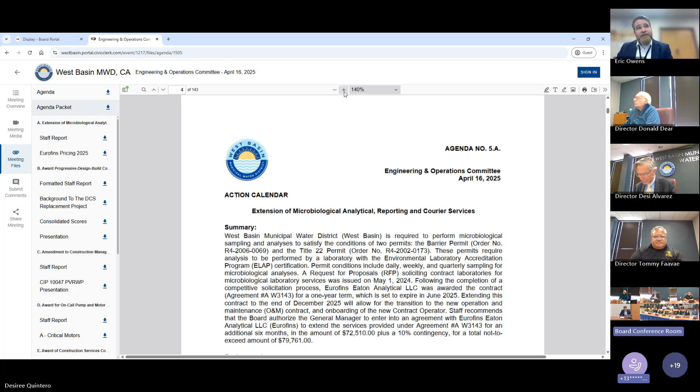Chair Alvarez, today's presentation, we have Mitchell McNearly, Water Quality and Environmental Compliance Analyst 1. I would note before handing it over to Mitchell that there will be a slight revision to the recommendation that he reads, but for the most part it's consistent. So we'll point that out and make the correction before the board. With that, Mitchell.

Thank you, Eric. Good afternoon, Chairman Alvarez and members of the board. I'm here today to present the action item on page 4 of your packet to extend the agreement for microbiological analytical reporting and courier services. Microbiological monitoring is required to satisfy the conditions of 2 permits, the advanced treated barrier permit and the tertiary treated Title 22 recycled water permit.

The permits are issued by the Los Angeles Regional Water Quality Control Board and require these analyses to be performed by a laboratory with ELAP certification. Permit conditions include daily, weekly, and quarterly sampling for microbiological analyses. Both the barrier and Title 22 permits require daily grab samples of total coliform to demonstrate that the recycled water produced has been adequately disinfected.

Additionally, microbiology samples are also collected for the Title 22 distribution system and 11 groundwater monitoring wells. The analyses are performed using standard method 9221, multiple tube fermentation technique, with a 2 MPN per 100 milliliter detection limit and have a short holding time of 8 hours. This means samples need to be collected, processed, delivered, and begin analysis within 8 hours, or the test results are invalid and can result in a violation. If total coliform is detected and confirmed in a sample, further analysis for fecal coliform and E. coli are performed to determine a possible source of bacteria.

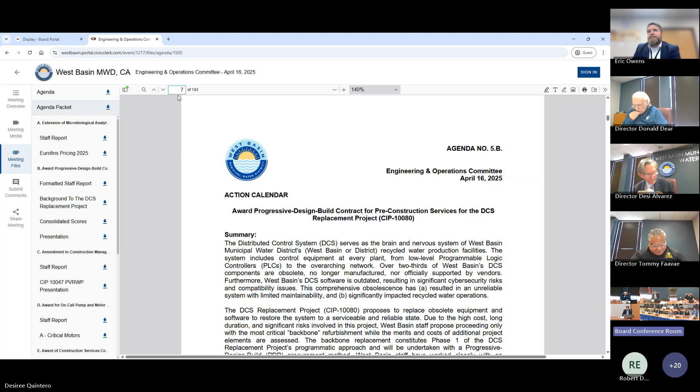Because we have a new director on the committee, I just wanted to give a brief reminder of the background to this decision. So DCS stands for Distributed Control System. You may also hear SCADA, which is Supervisory Control and Data Acquisition. Our system is a hybrid of these two. The district, we commonly refer to it as the DCS. It's a control system that's spread across all of our treatment plants, controls every process from an individual valve up to an entire site.

At the lowest levels on the graphic you see on the right are the PLCs that control individual process equipment, such as pumps and motors. And then at the highest level is the data highway, which is a network. In between those two, you have our controllers and servers, which combine to control the various elements of our plants and store information. These are all accessed by operators at workstations, and these are the computers you see in your plant control rooms and out in the field. And all of these systems are connected via fiber optic cables within our network.

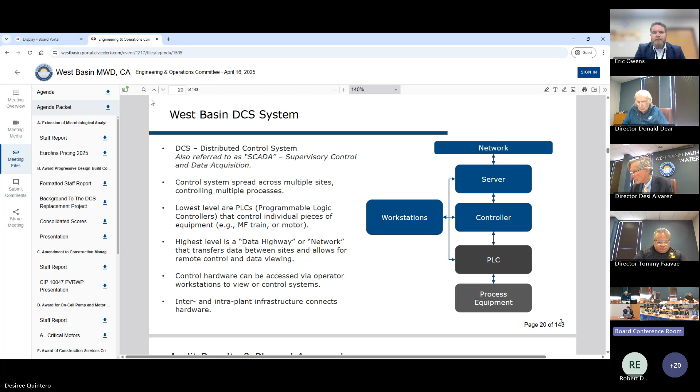However, replacing the entire control system would be a huge task, and as we don't yet know which processes will be required in the future, staff are advising against a full replacement at this stage. Instead, what we've done is separated the control system replacement project into two sections. The current project aims to replace the backbone systems in the top half of this graphic, and those account for approximately 40% of the control system, but 80% of the risk. This backbone of our control system will be required no matter which future direction the district takes. Once this backbone system is replaced, staff will investigate whether further replacement of the process controls at the bottom of the graphic would be beneficial. Next slide, please.

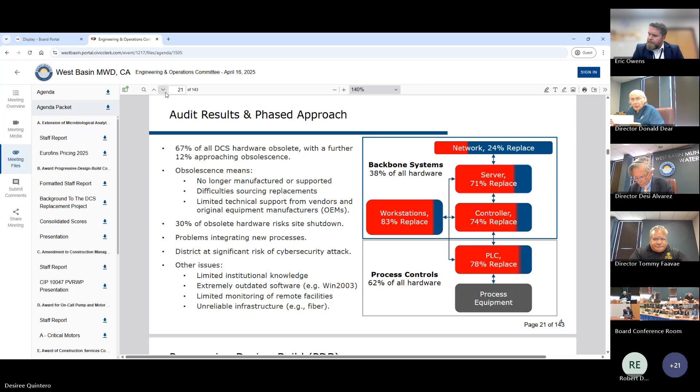Back in February of last year, West Basin staff elected to pursue a progressive design build approach to this project. This effectively means we'll have a single contractor team throughout the system selection, design, and installation. There are a few technicalities that make this approach well suited for this project. In the interest of time, this backbone replacement project is estimated to cost up to $12 million all in, with completion estimated in around 2 to 3 years' time.

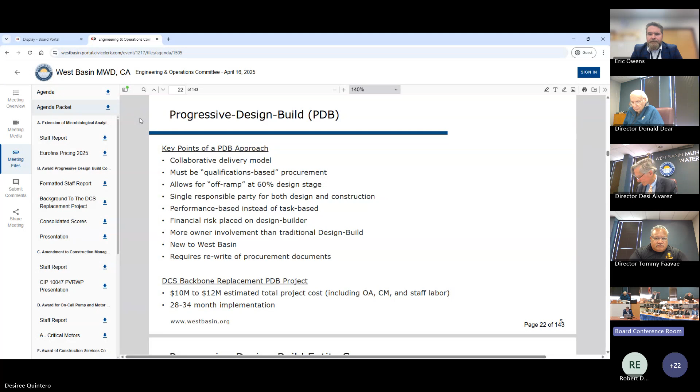I won't go through every task, but task 3 is worth mentioning. It's critical that we select a control system that will best serve the district for potentially decades to come. After the PDBE has familiarized themselves with our system and fully documented every element in the field, they will develop a long list of at least 10 different systems that could meet the district's needs. Using agreed upon evaluation methods, the design builder will whittle this down to a short list of at least 3 systems to be fully vetted and evaluated. The design build team plans to split into 3 groups, each representing and championing a different system, ensuring the final selection is genuinely competitive and not simply based on which vendor has the best marketing team.

While the design builder will present their recommendation, the district will make the ultimate decision on which system is selected. Staff anticipates bringing that recommended system before the board around November this year, towards the end of this calendar year. This system selection is critical to the success of the project, as the design, standards, governance documents, and guaranteed maximum price proposal will all be based around the selected system.

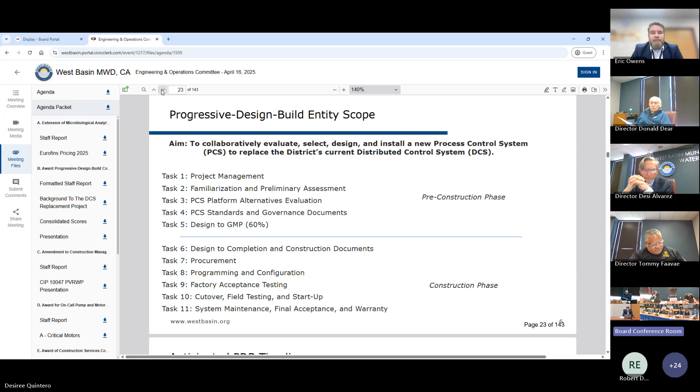We're aiming to onboard the design builder prior to the final quarter of this fiscal year, and staff are aiming to bring the GMP back to the board around the end of the 2025-2026 fiscal year. If approved, staff hopes to begin construction at the start of the 2026-2027 fiscal year and finish around the end of that fiscal year. Overall, we estimate the project will take around 28 months to complete once the design build is on.

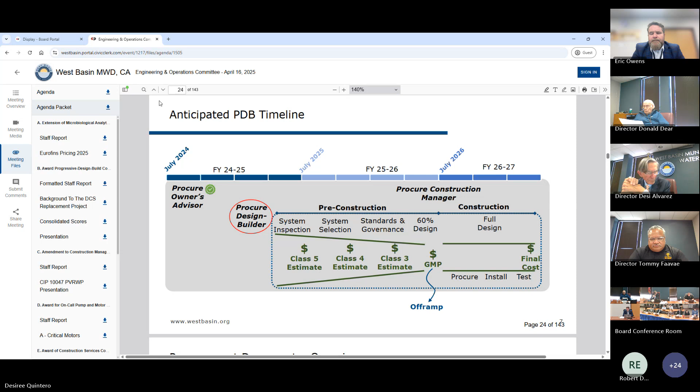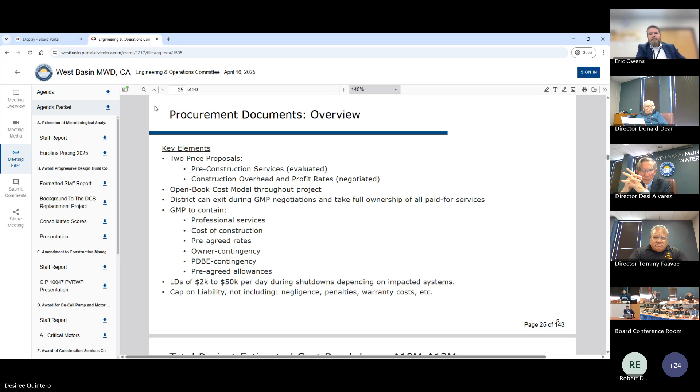Staff is currently estimating this to be between $7 and $9 million for this construction phase, and that estimate will narrow as we proceed throughout the pre-construction phase. In total, that brings us to the staff estimate of between $10 and $12 million over the next few years.

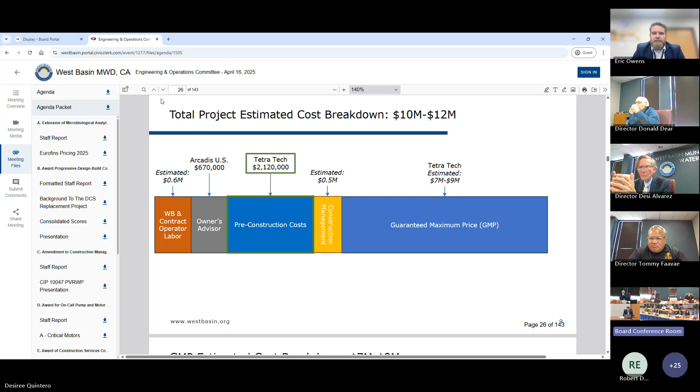And then a profit margin, or overhead profit margin, of 10% will be applied to that by the PDBE. There will also be a significant amount of professional services in the construction phase of this project, unlike a normal construction project, because there's a significant amount of programming and project management involved. Those will use the hourly rates from the pre-construction phase.

Then we have two contingency buckets: one on the PDBE side and one on the district side. Those contingency buckets will be based off of the risk assessment conducted throughout the project. Those risks will be quantified and put into the contingencies, and if those risks are realized, money will be taken from the contingency to deal with them.

And then there are allowances at the end. These are pre-agreed potential work tasks. For example, if we wanted to extend this control system out to our distribution network, we would effectively pre-negotiate a set cost for that work with the Progressive Design Build entity. If during construction we decided to actually do that work, we would pay that fixed cost, but if we don't actualize the work, we wouldn't pay it.

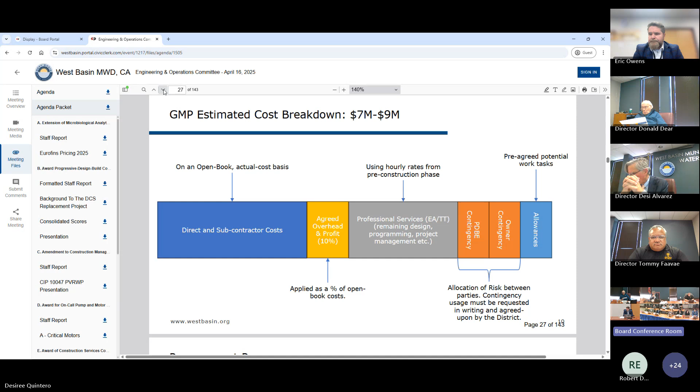Tetra Tech proposed a pre-construction phase cost that was the second lowest with a reasonable hourly rate, which is good since we'll be using that for any professional services in the construction phase as well.

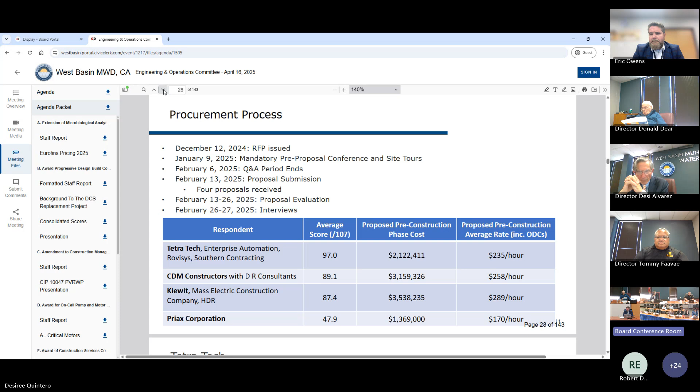The evaluation team is very confident in Tetra Tech's team and proposed plan. As mentioned, the decision was unanimous, for a few very good reasons. While Tetra Tech is the primary entity, the bulk of the work will be undertaken by their subsidiary company, Enterprise Automation, with Rovisys providing automation support and Southern Contracting undertaking the boots-on-the-ground electrical work. It's important to note that Southern Contracting are a member of IBEW Local 569.

The proposed team has delivered over 3,500 DCS and SCADA projects. They are certified experts in all of the major systems out there, in some cases being one of only a handful of firms holding the highest level certifications. They are fully system-agnostic integrators, so either Enterprise, Rovisys, or both are some of the biggest US integrators for many of the major control systems. Rovisys, for example, has now installed more Rockwell systems than Rockwell have themselves. Due to this, the team holds significant leverage over these vendors, which will benefit West Basin as it ensures the district isn't held hostage by any vendor we select. There are more reasons listed here, but I'll keep moving in the interest of time.

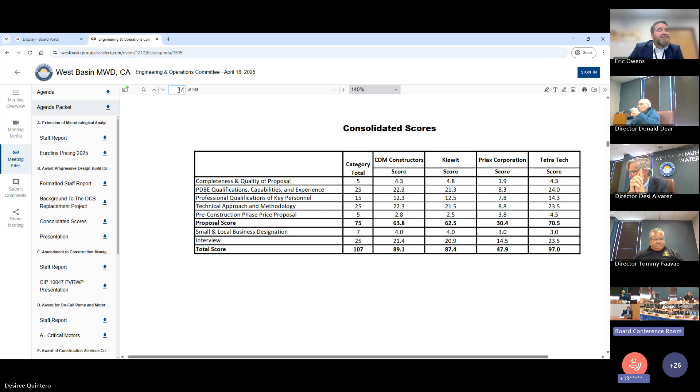I have a question or clarification. So go to page 26. You mentioned that you're going to come back after the pre-construction phase here, and we're going to retain a construction manager. Yes, intention. So that's separate from the owner's engineer?

Correct. Initially those were going to be the same contract. Yeah, that's what I thought. There could be a request to separate those. The owner's agent would not be precluded from bidding on the construction management, so there is potential that it's the same. Okay, but that will come back then as a separate one, and that will come at the end of the pre-construction phase.

Ideally, we'd bring it back slightly before so they can review the GMP as well, just to make sure that there's a construction analysis. And just to remind me, the GMP price is going to be separate.

In other words, we're going to pay for the pre-construction for Tetra Tech to do all the design work, make the recommendations for what their installation's going to be, et cetera. And then they will be paid a GMP fee for the actual installation and modifications and upgrade to the DCS. Yes, if we agree the GMP with.

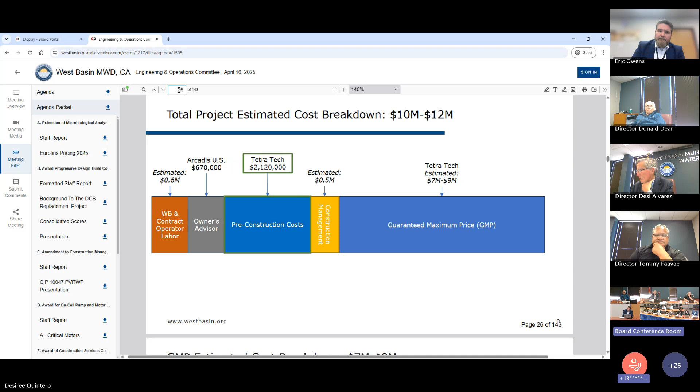Yeah, absolutely, I'd like to see that, like a chart that kind of gives a breakdown of that. We have a rough estimate on slide 24, at page 24, but we can make that more detailed. That's just in quarters. Oh, got you. Yeah, I think more detail would be good.

That's it, Chair Alvarez. Chair Alvarez, if I might also add that under the progressive design build project delivery method, not only will the board have an opportunity to review that guaranteed maximum price before making the move to award it and move forward, but if we cannot come to terms with the contractor based on their design through this PDB process, we do have the option of taking that design and putting it out to the market and allowing them to go through a bid process just to make sure we're getting the best price.

And how long would that process be? The same as our current process. I mean, it would add months to the procurement of a new contractor to deliver that design, but it is an off-ramp that if we're just not coming to agreement with the costing that they have developed for the guaranteed maximum price.

Would it be like a progressive timeline, like the progressive DB that went out? Would that be- Yeah, this is a key part of the progressive design build process, and that's why we chose it. It allows us to have that off ramp around the 60% design.

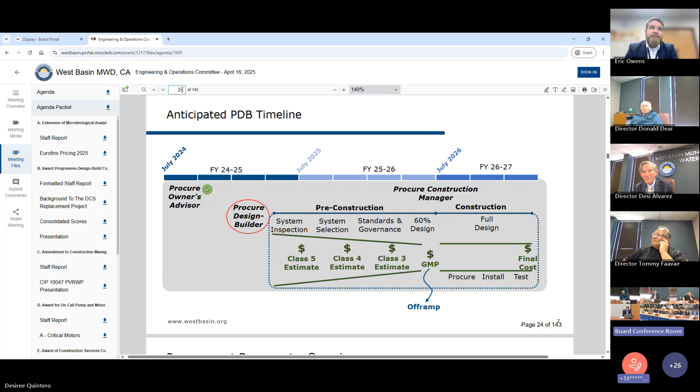All right, okay. So I shouldn't see any additional need for help now putting together the bid document. We're going to have basically a pretty complete set of specs. It's just a matter of putting on that front end stuff. And if you guys can't do it, you'll have.

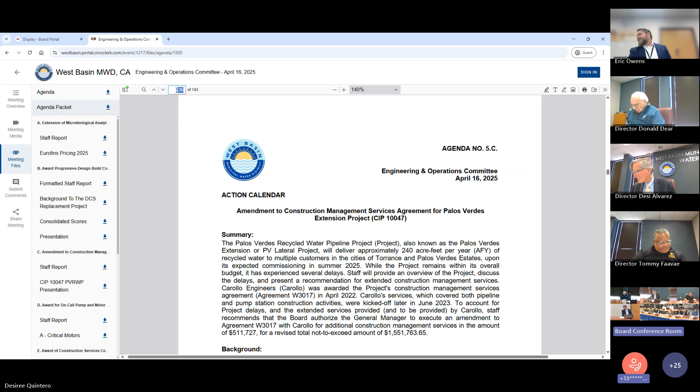One of the items or issues we have encountered is delays. Those delays, as you can see on the slide, are on the pipeline and on the pump station too. This particular slide covers the delays we encountered on the pipeline.

As you can see, there were issues getting the permits issued for the contractor, and there were also changes right at the beginning of the project regarding traffic control plans that had been previously approved by the regulatory entities, as well as underground utilities found along the 3.5 miles of pipe we installed. In addition, some rains affected our construction on Vista Montana, resulting in a closure of that street for a while.

We also worked with the city to rearrange the slurry sealing to still stay within the bid quantities but accommodate the areas.

Another hurdle we've had is the SCE redesign of the underground conduit. SCE had originally given us plans, and then when we were in the field there were some changes, one due to erosion we found, and also closeness to a tree, which generated another set of plans. We quickly worked with them and were able to identify what needed to be done. But we also need SCE to come in and master meter and power that particular facility.

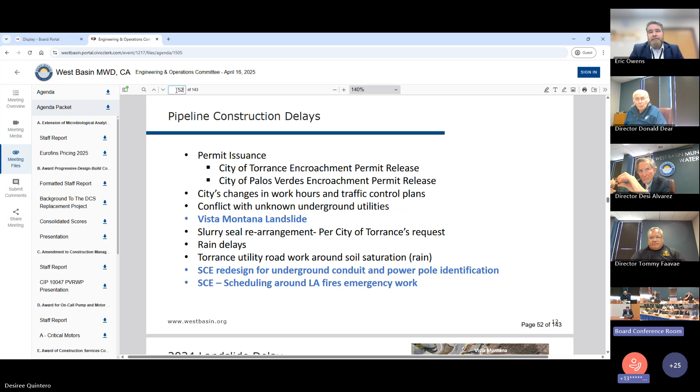Slide 20 concentrates on the delays we encountered at the pump station. In similar fashion, we have some issues with permits, some underground utilities, some rain. One of the biggest hurdles we've had regarding completion of the project is the delivery of the switchboard.

It's the only piece that unfortunately didn't make it on time for the contractor to install. While we are having discussions with the manufacturer, the vendor, and the contractor, right now the manufacturer has advised us that the switchboard is expected to arrive June 12, 2025, which means that's when we'll be able to commission this facility, adding a significant delay to the project.

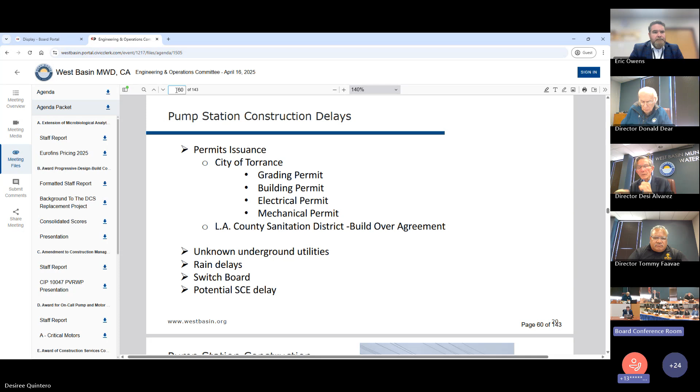Following that, we again need to work with SCE to come in and power the system in order to get the project tested and commissioned. So all of these delays lead us to what are the next steps on the project -- let's go to slide number 30, please.

So on the next steps, we've completed the installation of the pipeline and we're closing out some items with Palos Verdes Estates and SCE. We're hoping to close out this project in May 2025. For the pump station, the contractor has been able to continue with normal operation of construction. There are some activities around the parking lot expected around 2025, and the delivery of the switchboard that comes more towards summer.

You see a range on timing for the SCE energizing system and estimated close-up because SCE could be ready on day one when we call them to energize the system, or it could be a delay of a couple of months. That's why you see a range on the estimation on the close-up.

As you can see, if you can go to slide number 32, this has had an effect on our construction management services, performed by Carollo Engineers. From the very beginning, we had a late start on the project due to all these jurisdictional entities we had to obtain permits from, which had different timelines on delivering those permits to us. However, once we started the project, we ran into construction issues also.

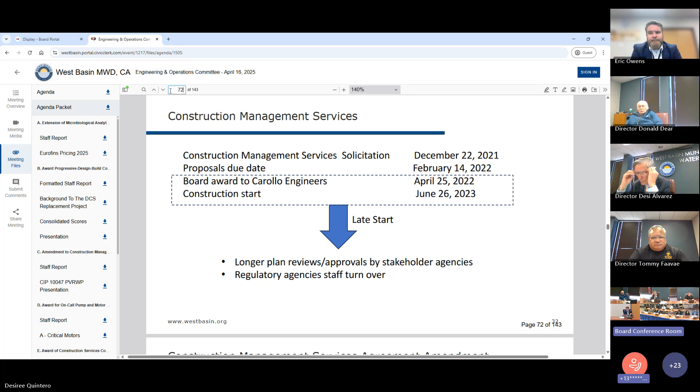So if we can go to the next slide, slide number 33 - this summarizes the differential, or the deltas, on the duration of the pipeline. The pipeline has exceeded by an additional 140% on timing, and the pump station by approximately 50% of the original timing, as of April 1st, 2025. This means our construction management services performing inspection in the field have also exceeded the originally anticipated time to perform these two projects.

So we have been working with Carollo Engineers on negotiating a number, and we are here to present that Carollo is requesting an additional $511,727, which equates to 2,197 hours total for construction management, resident engineer, project controls, and inspector.

And with this, if we can go to slide number 34. On this slide is a summary of what the original contract is, what the amendments have been, and what we are proposing here as a change order.

The original project was awarded for $962,624.40, with a 10% contingency approved. We have only made one amendment with the contingency of $18,849, and the rest of the amendments we have done are just for time extension, to get the project completed. Right now, we are requesting the amount of $511,727 to do amendment number 5.

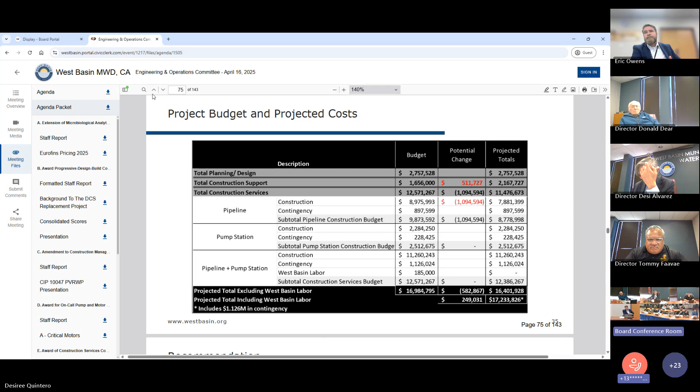So this is not unforeseen? The $511,000 - well, it is, but that's construction management services. If we go to the previous slide, we had awarded the project for $962,624.40, and the 10% contingency approved by the board was $96,000.

There was an amendment, so approximately $72,000 remains in contingency. But the $511,000 exceeds what is remaining in contingency. That's why we are asking for that amendment approval. That's all the questions.

Thank you. Director Dear, no question? President Gray, do you have any comments, questions? No, I don't. Thank you.

I have a couple of questions and comments, kind of for the future, but overall, the project is going to be finished in May. Correct? Yes, we're waiting - that includes the pump station.

The pipeline installation is completed and master meter - we're closing an item with Palos Verdes Estates and we are still working with SCE to come in and power the master meter, which is the window we're working with them. Monica, you have a slide, I believe, that has that note on there.

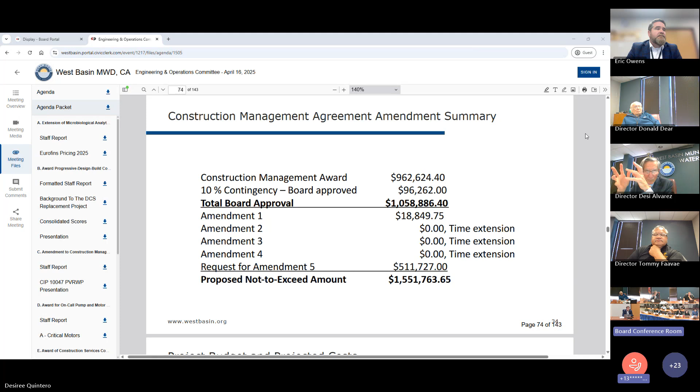Yes. And I just want to make sure the directors understand that with this switchgear delay, it won't be delivered until, I believe, June. But my point is that for all practical purposes, the project is finished and we're waiting for a switchgear, so it doesn't mean you're going to have a CM sitting around. There will be some downtime, I think, waiting for that final piece.

But we shouldn't be paying for that - it should be sent home. And the same thing on the pump station, because you have both the SCE switchgear. If I recall that slide, it affected both parts of it.

So most of the work being requested for additional reimbursement here is work that's already been done. Yes, and that's been incurred over the last 6, 8, 9 months. So my question is, we've already incurred this - we're not looking to modify or amend this contract for additional work that's forthcoming.

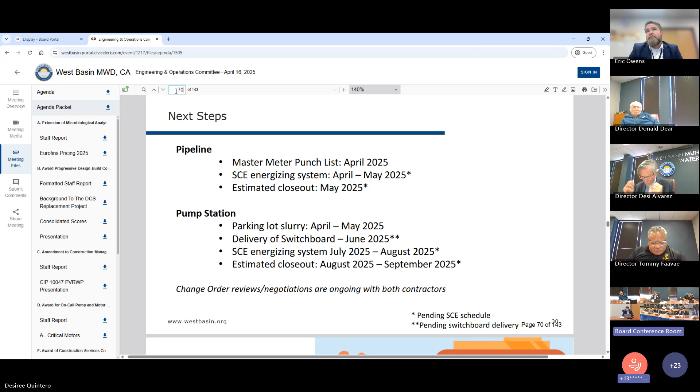Correct. So if we go back to that slide on the construction management services agreement amendment - I believe slide 33 - amendment number 1 had $18,000, and there were amendment numbers 2, 3, and 4. Those were time only, they did not add cost.

But for the breakdown of the $511,000 - basically for the pipeline, the amendment being requested corresponds to $336,000 and change, and that's for efforts additional to the original labor hours we were anticipating.

Same thing, similar fashion with the pump station - you can see on that table, second row from the bottom, where it says one month pump station. That's basically an item we are anticipating, like what happens if there is a delay because SCE is not coming into the field. So we're kind of anticipating that in case it occurs, that would be the basis.

So what we're looking at is basically costs that have already been incurred. Correct - that you kind of negotiated back and forth with Corolla, saying well, you might be asking for too much, and you've come up with a negotiated fee to make up the additional cost.

So a couple of comments on that - overall, the project is not that far behind schedule. Construction started in September, October of '23. Although the agreement with Corolla was signed in June of '23, they really shouldn't have started until construction actually started. The pipeline was supposed to be 12 months, putting it in the September, October '24 timeframe, and the pump station was another 8 months, assumed to start 12 months later. So that puts us pretty much where we are - overall, we're pretty good.

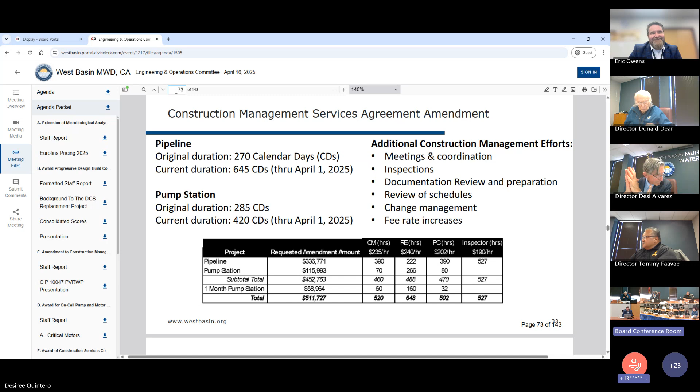All right. Well, I'm not a happy camper, but I think we need to move this forward. You concur? Yes. Okay. All right, it's almost 5:00, Director Faavae.

If you need to leave, we understand. I got a few more minutes. If we could do something in a few minutes.

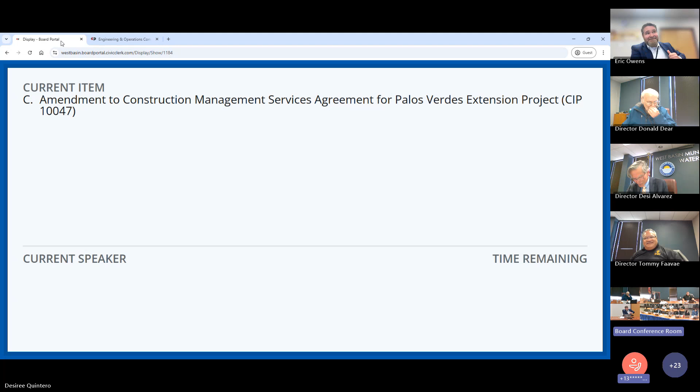All right, so we'll move on to item 5D, award of on-call pump and motor repair, rebuild and replacement services.

Mr. Assistant General Manager. Chair Alvarez, as you mentioned, this is for an award of on-call pump and motor replacement services. We have Jason Kung, Operations Analyst 2, to present the item today.

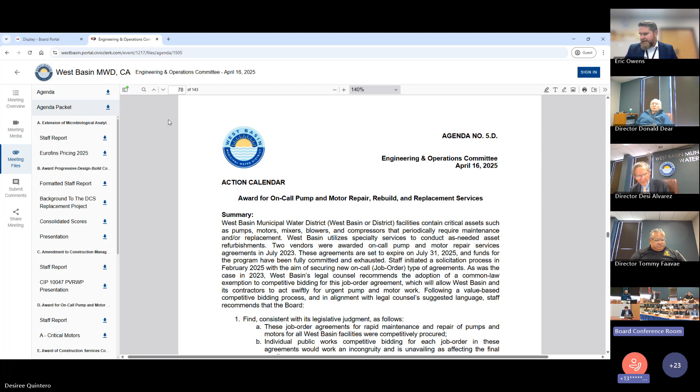And I would add that this is a contract that came before the board in similar form or fashion 2 years ago with a different style of recommendation built into it. Jason will get into all of that, but hopefully it looks familiar to the board members that have been here previously.

Jason. Thanks, Eric. In the interest of time, I've timed myself. It takes about 4 minutes, so should be good.

This item is to request the board's approval to award new initial 1-year on-call agreements for pump and motor repair, rebuild, and replacement services to Bonds Industrial Repair and Powers Brothers Machine, Inc., each starting at $250,000 with a combined not-to-exceed program amount of $1 million.

West Basin's facilities rely on numerous rotating critical assets, including pumps, motors, blowers, and compressors, to maintain recycled water production, some of which are listed in attachment A on page 82 for reference. These assets occasionally require rebuilding or replacement, and rapid repairs are essential to avoiding service interruptions.

Our current on-call contracts are set to expire in July of 2025, and available funds have already been fully committed.

Staff issued a request for proposals on February 14th via West Basin's online bid system, in which over 4,000 vendors were notified. 2 proposals were received on March 14th, and after evaluating them based on pricing, past performance, capabilities, safety records, and references, staff is recommending awards to both firms.

This dual award approach allows us to alternate assignments in a round-robin style, time permitting, to maintain flexibility and ensure vendor availability for urgent tasks.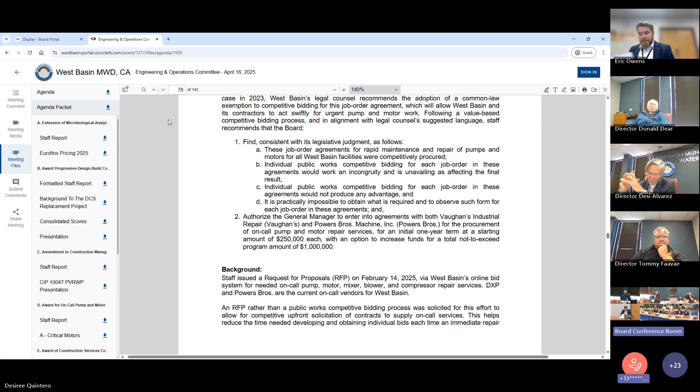As we have done previously, West Basin's legal counsel first provided feedback on the solicitation process back in 2023, so there is absolutely no ambiguity. Counsel recommended making findings to support the adoption of a common law exemption to competitive bidding, limited to this job order contract, to allow West Basin and its contractors to act swiftly for urgent pump and motor work.

These findings are referred to as the Graydon exception to competitive bidding, after the Graydon v. Pasadena Redevelopment Agency case in 1980. The exemption permits job order contracting for repair work that must be promptly secured before competitive bidding could be exhausted.

Here in this case, the district's procurement strictly complied with the district's policy governing the procurement of repair and maintenance work, which is a competitive process, and further procurement through competitive bidding for each job order would not produce a meaningful public benefit beyond what the existing process has already achieved.

With that, I'll read the recommendation and answer any questions after, which is that staff recommends that the board, one, find consistent with its legislative judgment as follows: these job order agreements for rapid maintenance and repair of pumps and motors for all West Basin facilities were competitively procured; B, individual public works competitive bidding for each job order in these agreements would work an incongruity and is unavailing as affecting the final result.

C, individual public works competitive bidding for each job order in these agreements would not produce any advantage. And D, it is practically impossible to obtain what is required and to observe such form for each job order in these agreements. And two, authorize the general manager to enter into agreements with Vaughan's Industrial Repair and Powers Brothers Machine, Inc. for the procurement of on-call pump and motor repair services for an initial one-year term at a starting amount of $250,000 each, with an option to increase funds for a total not-to-exceed program amount of $1 million.

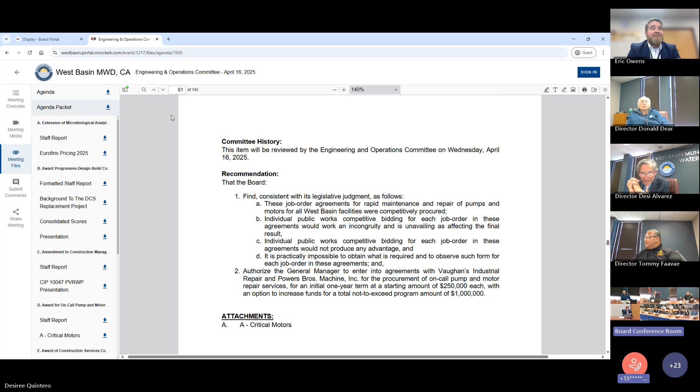Thank you. Okay, thank you. Director Faavae, any questions on this? No? Okay, Director Leo? No, go for it. Director Dear? No, thank you. Okay.

Just for clarification, basically it's a task order contract. Initially, each is going to be authorized up to $250,000, that's $500,000. And then each will get a second task order for $250,000, or one may get two additional task orders for $250,000, because it's up to $1 million. I just want clarification how we get to the million.

It can be evenly distributed if it works out well, which is more likely what we'll end up doing. But we want to leave the remaining $500,000 as an incentive for the vendors to continue to do good work and have a good relationship with the district. That $500,000 could also go to one vendor. It's not intended to be that way, it's just whoever bids on it.

Correct. So that leads to my second question, which is, in order to keep it competitive for any one task order, will you ask each contractor to give you a bid? It depends on the case of the task order. I would look at each individual task order, not so much as $250,000, but some amount under the $250,000 that would bring us up to the $250,000. If time allows, we will definitely approach both, but if it's a little bit time critical, the idea is to act quickly.

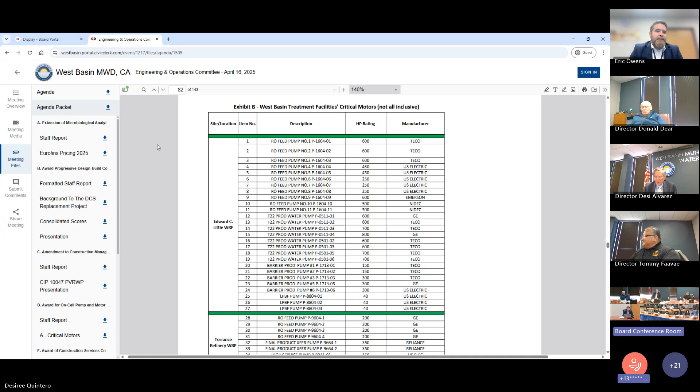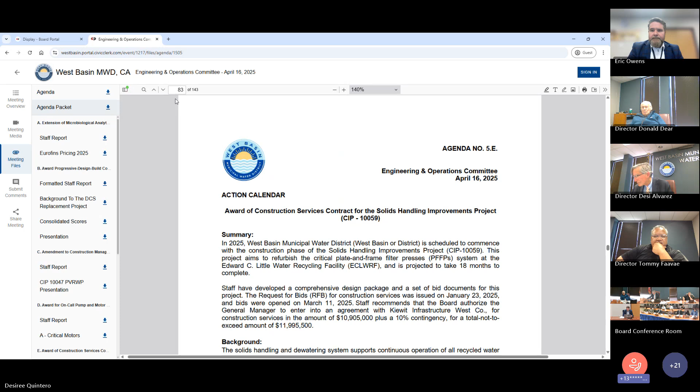Chair Alvarez, as you mentioned, this item is related to the construction services contract for the solids handling improvements project. We have John Benner again presenting on this topic, Engineer 2. And with that, I'll pass it over to John. Good afternoon again, directors. I'll be presenting item 5E, recommending the award of a construction contract for the solids handling system improvements project. This begins on page 83 of your board packet. We'll be beginning today with the presentation on page 88.

Next slide, please. So just as a reminder, this project aims to rehabilitate the 30-year-old solids handling filter presses over the next couple of years. These presses are used to process between 80 and 100 tons of solid sludge every day, and it's a critical part of these operations.

The poor condition of these presses has caused rapidly increasing operations and maintenance costs in recent years. Last fiscal year, the system cost the district approximately $7.5 million in operations and maintenance. Staff have undertaken several studies over the years, and they have shown that refurbishment of these presses is the most cost-effective option, with estimated savings of up to $3.6 million per year. So we're now at the end of the design phase, which began in August 2023.

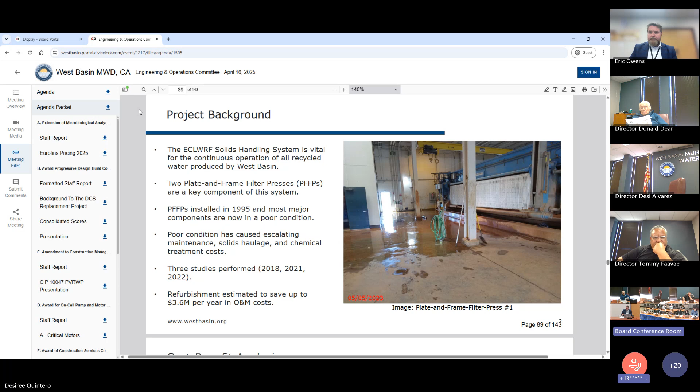The initial capital expenditure over the next couple of years will be offset by the O&M savings each passing year, starting in the second year of construction and then upon completion. Our calculations show this refurbishment will save approximately $3.6 million per year in O&M savings for the district, that's an additional $300,000 every month the system remains in its current condition. It's anticipated the break-even point will occur sometime in 2029, with these savings leading to a net positive after that point.

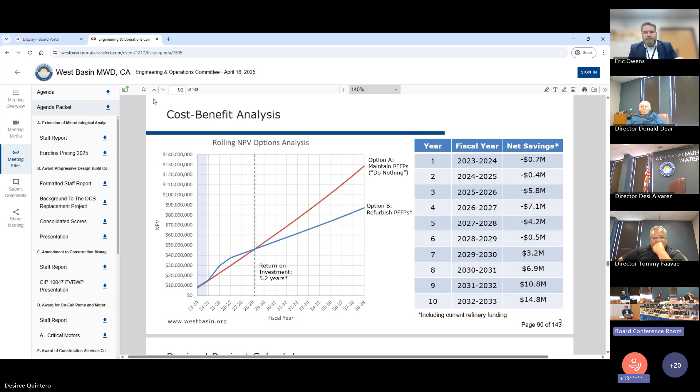The main thing to note here is that the construction cost came in $200,000 higher than the engineer's estimate, so the total project cost and the construction cost are higher by $200,000 than last time we presented. In addition, the contract award was pushed by a month, since the contractors bidding on the project requested an additional two to three weeks to put together their bids. This has pushed the anticipated project completion out to December 2026.

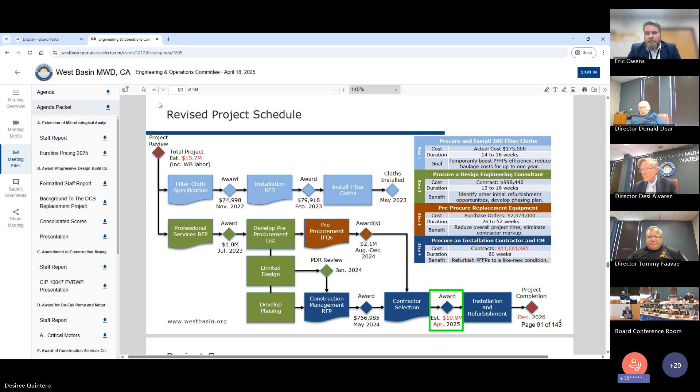The first addition is pH probes in the four sludge conditioning tanks. Currently, operators manually dip sample cups into the tanks to calculate the pH of the mixture, so these pH probes will allow them to see pH values for those sludge tanks in real time on their workstations.

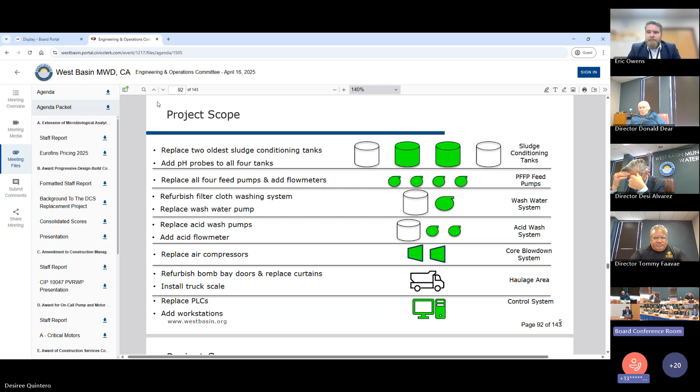The second addition is a truck scale beneath the presses. Currently we rely on the haulage contractor providing weight tickets as evidence of how much they haul away, and they're invoicing us around $200,000 per month to haul away the solid sludge. So we decided to put in a truck scale underneath the presses so we can validate and verify those tickets.

This slide shows the work we'll be doing to the presses themselves, as opposed to the ancillary equipment shown last slide. There's a lot here, but effectively we'll be replacing all the hydraulics, instrumentation, and safety components, and refurbishing the 280 steel plates across the two presses. All in all, the aim of this refurbishment is to significantly increase both the efficiency and reliability of this sludge management system, which we estimate will save the district approximately $3.6 million per year.

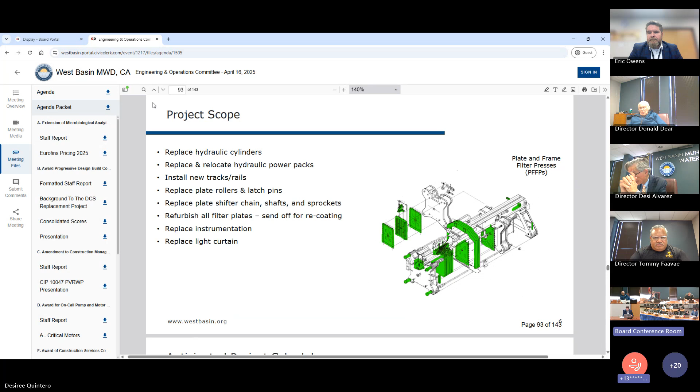So onto the actual action item today. Staff advertised for construction bids back in January and received 2 bids last month. The lowest responsive bidder was Kiewit Infrastructure West with a bid of $10,905,000, which is pretty close to the engineer's estimate of $10,640,000. Since we received the bids, the R2 Build bid has been deemed not responsive as they failed to comply with our small and local business advertisement policy. However, as they aren't the lowest bidder, this doesn't affect staff's recommendation today.

Kiewit are utilizing Mass Electric as their electrical subcontractor. Both organizations are union signatories, with Kiewit being signatory to unions of several trades, including laborers, carpenters, masons, and electricians, while Mass Electric are a member of IBEW Local 11. Next slide, please.

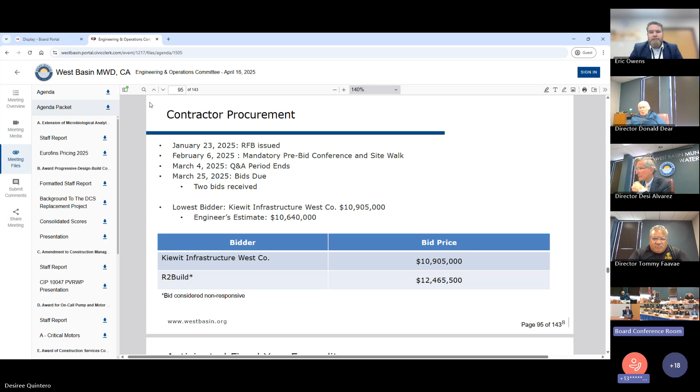This slide depicts the anticipated expenditure on this project in each fiscal year. As always, changes from last time we presented are in red. As you can see, the construction total has changed. As I mentioned before, that's because the lowest construction bid was $200,000 higher than the engineer's estimate, so those costs have gone up by $200,000. And the red in the pre-procurement row is due to staff developing a more realistic distribution of those pre-procurement costs. So the total pre-procurement cost hasn't changed, but the distribution across the fiscal years has changed, as we've received shop drawings and other submittals and have a more realistic view of the timeline for those.

This fiscal year, we anticipate spending approximately $560,000, with the bulk of the project expenditure falling into next year's fiscal budget. As always, we show on the bottom right the amount of refinery funding that the district has already received for the project and how this affects the actual expenditure funded by West Basin. Next slide, please.

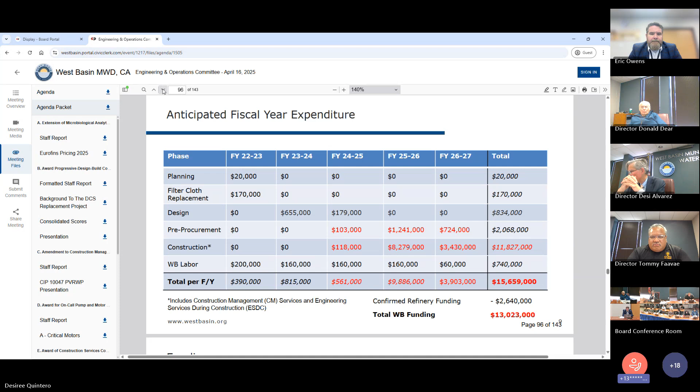And so that brings me to the recommendation for you today, that the board authorize the general manager to enter into an agreement with Kiewit Infrastructure West Company for construction services in the amount of $10,905,000 plus a 10% contingency, for a total amount of $11,995,000.

With that, we conclude our presentation. I'll take any questions. Thank you, Chair, do you need a vote? And then I can take off and you ask questions after? No, if you need to go, I can. So you don't need me to vote on this? Okay. Thank you, Stan. Right, Director Neal. President Gray, they have this spoken. President Gray.

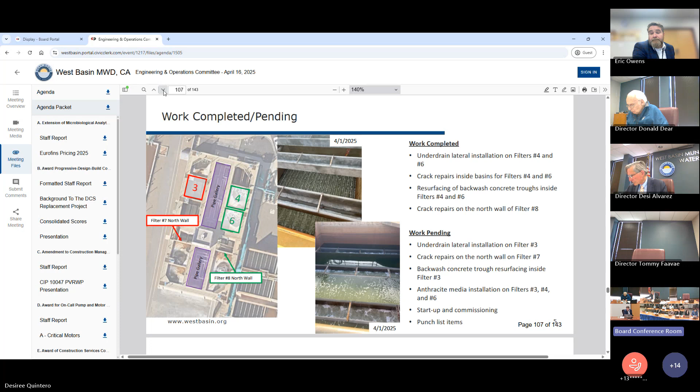Right now, currently pending is the underdrain lateral installation for filter number 3, the crack repairs on the north wall of filter 7, media installation for filter number 3, the final startup and commissioning for that filter, and some final punch list items as well.

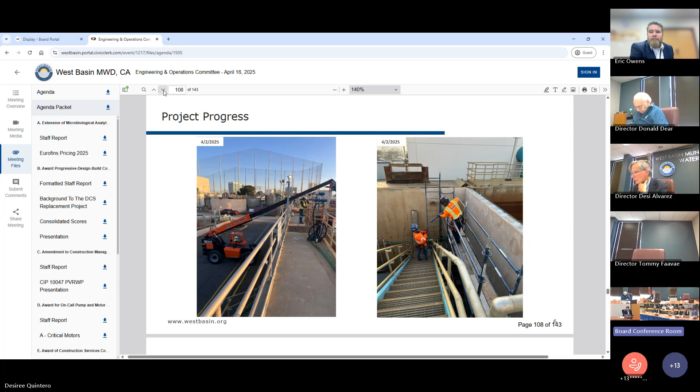Here I'd like to go over filter number 4 and number 6. To the left, this is before we removed the underdrain laterals at the bottom, prior to resurfacing of those concrete troughs, taken April 2nd. To the right is the other filter we had completed, so you'll see the resurfacing there, the big difference. You don't see any of the aggregate exposed, and also the new underdrain laterals at the bottom there.

So we're doing some final touch-up work. That's what filters 3, 4, and 6 will look like on the right once we're completed, minus the media that we'll be installing. Actually it has been installed now, but it's not shown here at the time.

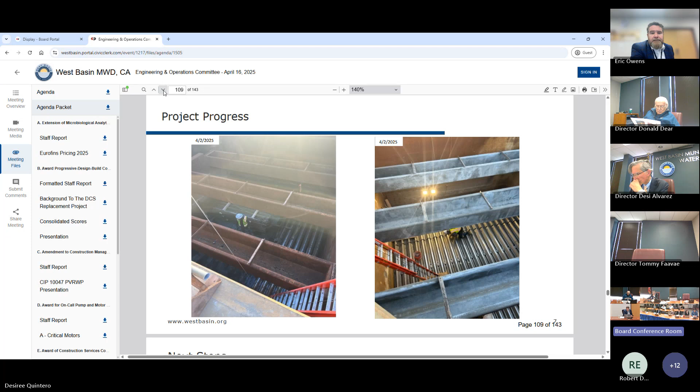The next steps for the project, first I'd like to discuss design services. We procure Carollo's services through our on-call design contract, and one thing we're considering is to continue with Carollo. We revised the construction bid package that we issued, but nothing really is going to change in terms of the bid package itself. We're potentially going to do the next filter, so we're going to do some small tweaks to the design, just lessons learned in the field, but other than that it's pretty much the same.

So it's either we stick with Carollo and potentially reduce our costs by doing that, or we put out another formal RFP for design services to get another design consultant on board. That's one of the options we have for design services, either continue with Carollo or put out a formal RFP.

Second is the program that was originally recommended. The committee did recommend doing 3 filters each fiscal year. One thing we're considering now, with the converted booster pump station, is maybe spreading out our expenditures over more fiscal years. So instead of 3, maybe doing 2 filters a year. There would be 8 total, so it would essentially add 1 more year to the overall program of the project itself. We're considering that as well.

Last but not least, some things we learned during this project is there's some equipment inside that we'd like to replace during this time. Since we have the filters drained completely, we noticed some drain valves need to be replaced and so forth, so we want to incorporate that work into the next version of the project, taking advantage of economies of scale since we have everything out and we're shutting it down already.

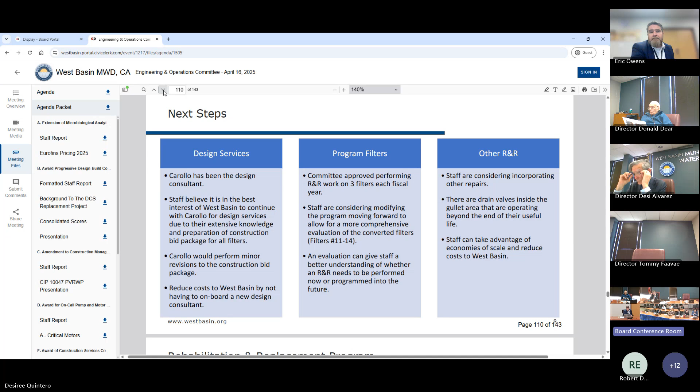Just a quick overview of the current program. This next fiscal year we would do 3 filters again, then fiscal year 26-27 another 3, and 27-28 the final 2. The potential program would spread it out through another year, doing 2 filters a year to spread out our expenditure. So adding another fiscal year for another 2 filters, 2, 2, and 2. And we would leave the converted filters at the end.

We would focus our efforts right now on train 1, which is 1 through 10, get all of those done, and then switch over to train 2 after we completed the first set of filters on train 1. Next slide.

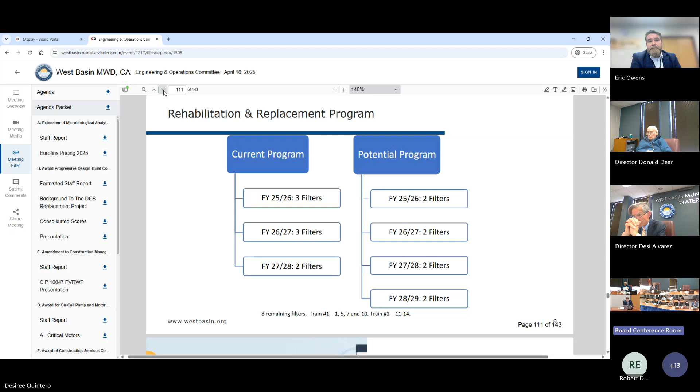That's it, that concludes my presentation. Happy to answer any questions. Thank you.

Director Neal. President Green.

I have questions, but I'm not going to ask a lot. I'd like to see you come back with a follow-up to this presentation, either next month or the following month, so we can keep abreast of it. A couple of things.

I don't have any issues with Carollo. I don't know if any other board members do. But I'm assuming you will be renegotiating or negotiating an additional fee with Carollo.

Yeah, I started the process already for this revision. We're looking at maybe 20 to 30K to do the next version of the bid package. Since they've been on this project for a long time, yes, they've been given quite a few task orders.

When you bring it back next month or whenever for information, if you could fill in here's what Carollo's scope to date has been, how much we've spent, plus moving forward in the next phase what the additional fee will be.